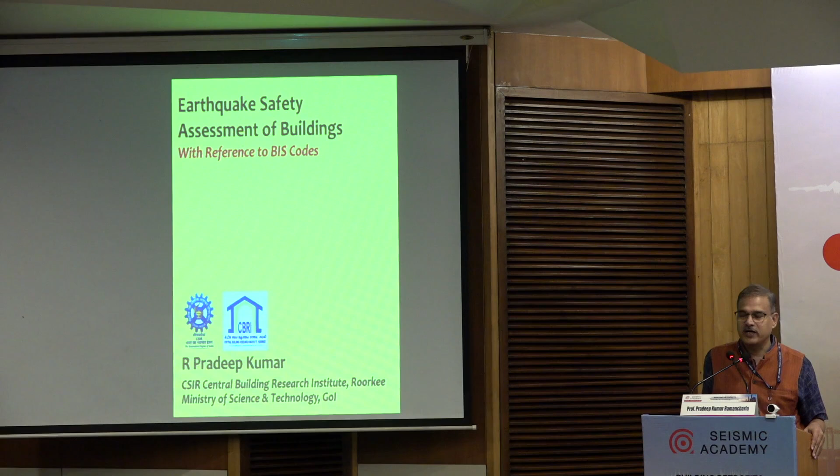So, earthquake safety assessment of buildings with reference to BIS codes. I'll tell you what are the challenges, what are the possibilities, and some examples. With some examples, I'll try to tell what we could achieve, and there are many more things which can be done. So let's start with these items which I want to present today.

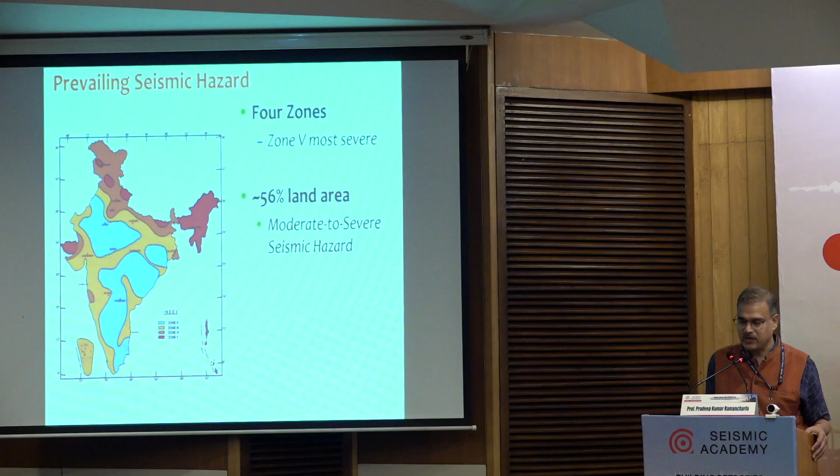You all know this is the prevailing seismic hazard. Currently, officially this is the hazard map, and soon it will change to this one. The country is divided into 4 zones: zone 2, 3, 4 and 5. If we calculate the area, 56% belongs to zones 3, 4, 5, which has a possibility of moderate to severe earthquakes. That means Bhuj kind of earthquakes might occur in 56% of the land, and 82% of the population is living in that 56% of land. That is another issue.

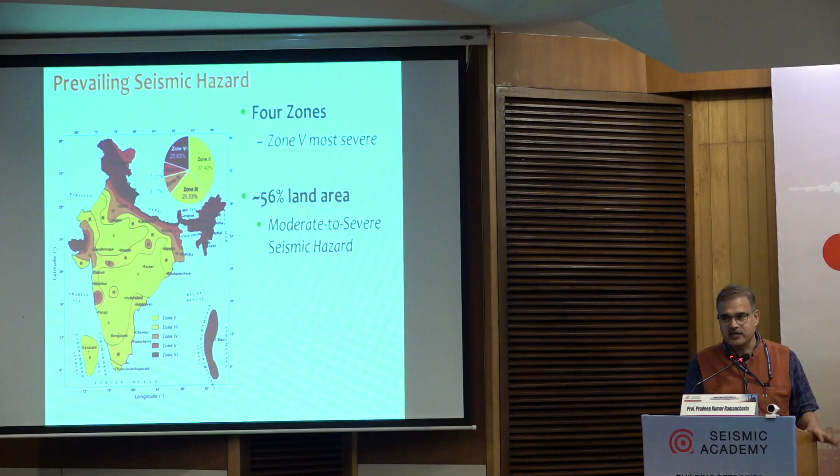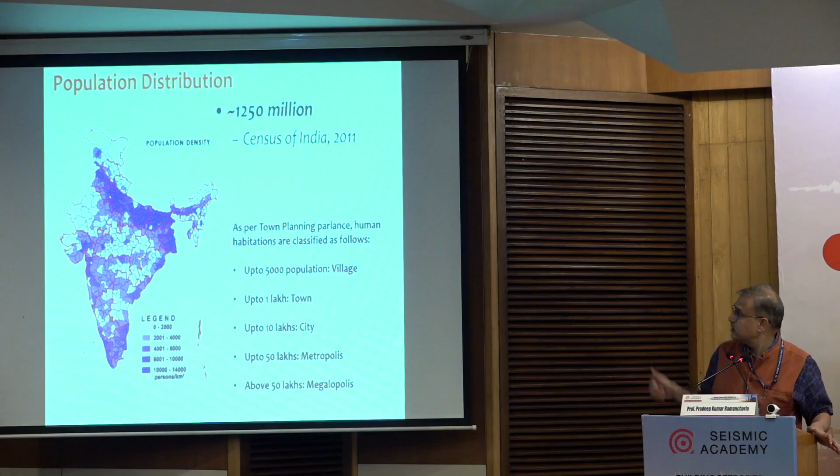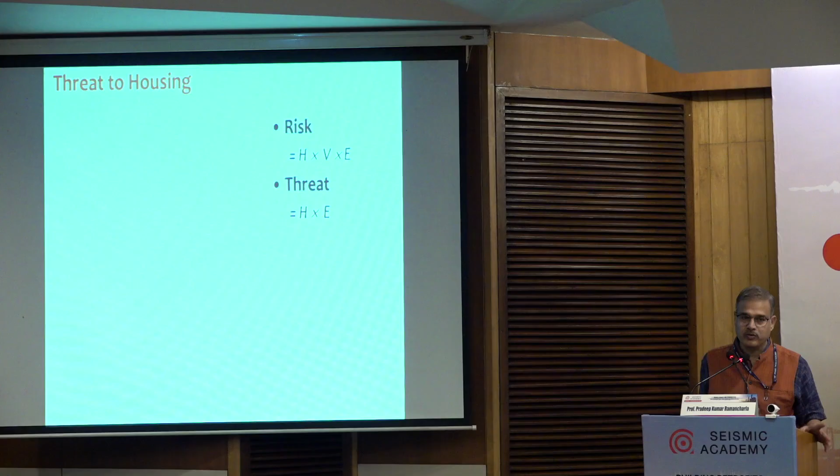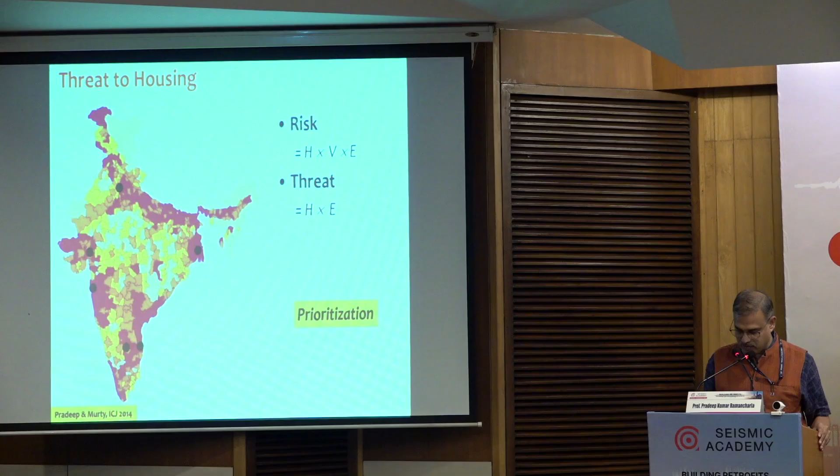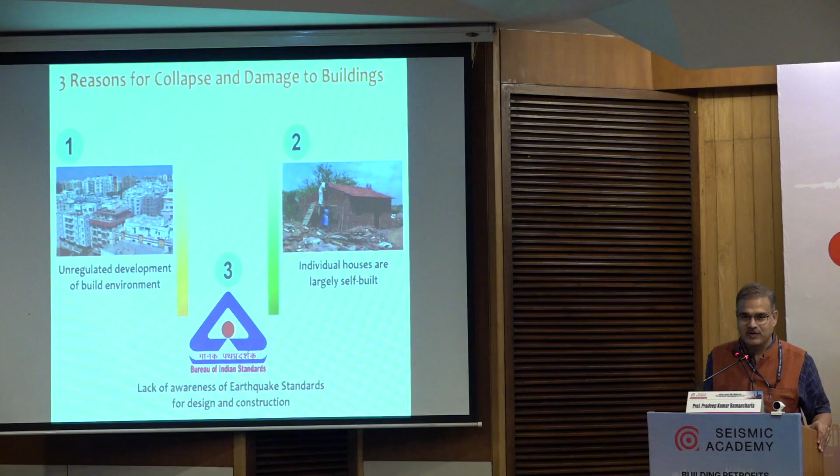तीसरी गलती है कि अपने आप को अपडेट नहीं करने की गलती। दीज आर द 3 मिस्टेक्स। सो वी हैव टू रिजॉल्व दीज 3। ओके, ये फैक्ट्स है, बस इतना ही है।

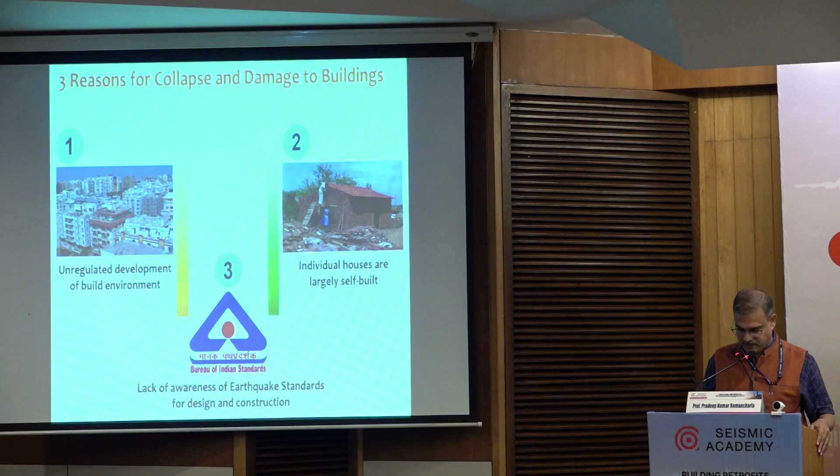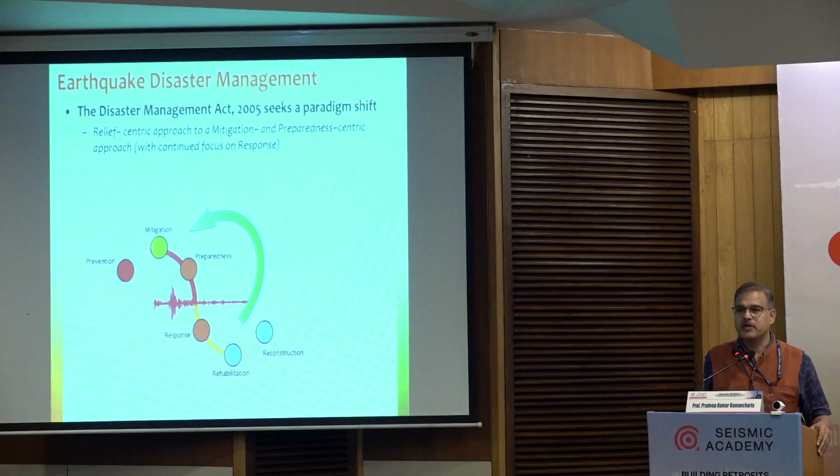So mitigation means what? Safety of buildings. Buildings which are coming up now, new, let us assume that they will be good buildings, but big structural stock is already there. So how to assess and retrofit? Unless we give a business spin to that, that is not going to flourish. So we need to give proper business model for assessment and retrofitting. Otherwise वो magic नहीं होगा।

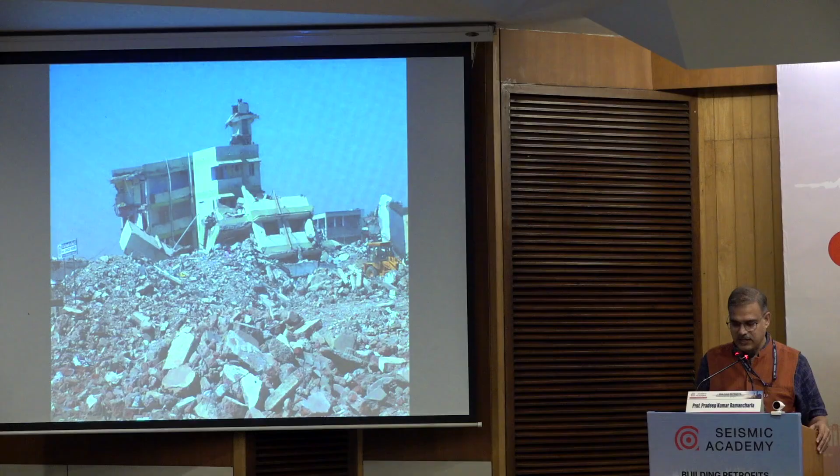Okay, some glimpses I will show. Earthquake behavior, some technical items, damages. After every earthquake we are seeing such kind of pictures. Let's take reference of Nepal earthquake.

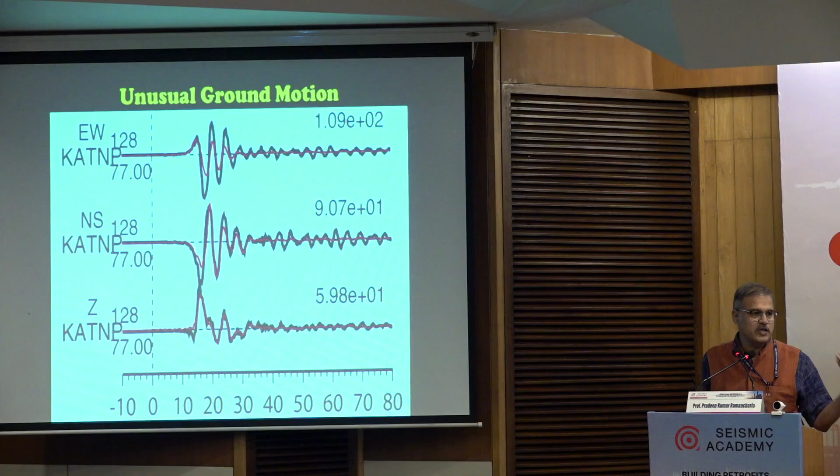Unusual ground motion. What is that unusual? Long period. So whenever long period ground motion occurs, main danger is to tall buildings or long period structures, whatever those structures are, and weak buildings anyway, they will collapse in any earthquake. So this is a famous Dharahara square in Nepal, long period, collapsed. Long period, the top element collapsed. Tall building, severe damage. Boundary walls, long period, collapsed.

So that means what? Earthquake is clearly showing that what it is coming up with. So we can understand easily that these are the things for which we have to protect our building. So for that, relevant clauses are there. The problem is what? We are taking these clauses lightly.

So my advice to everyone, whoever is in the field, okay, learn one clause a day thoroughly. Even in dream you will not commit any mistake while practicing that clause. One clause a day, that's all. In a year you will be mastering 365 clauses. Utne nahi hai, okay, bas one clause a day.

Promise today. Now coming to hazard. Hazard का मतलब क्या है? Simple. Hazard का मतलब है level of ground shaking which the building is going to experience.

That is measured in terms of acceleration, velocity and displacement depending on what type of structure you are doing it. How it is measured? There are many ways. Deterministic approach is there, probabilistic approach is there, a combination is also there. And there are many approaches which our experts are also generating, but finally they will be categorized into two and combination of the two.

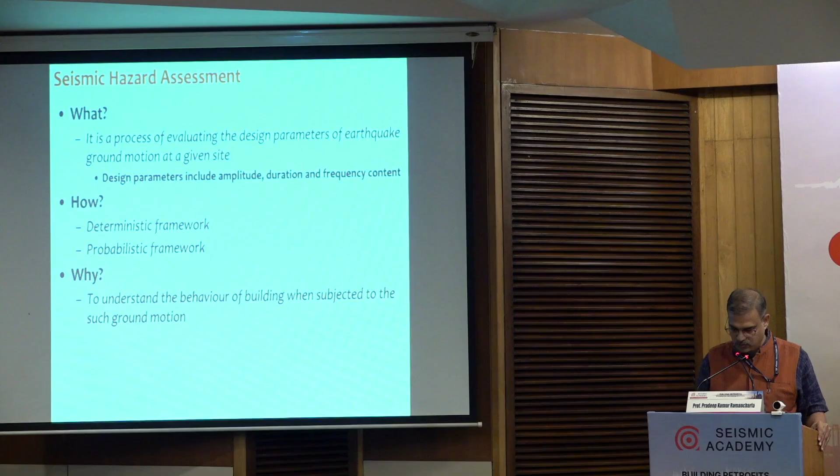Why it is needed? Hazard estimation to understand the behavior of the buildings when it is subjected to ground motion. But there are some gaps in it. Presently, we don't have probability in our hazard map. That means what? A zone 4 near the foothills of Himalaya is equal to zone 4 in the peninsular India.

That is the peak ground acceleration. But unfortunately, after how many years that earthquake is going to occur, that point is not included in the hazard map. Maybe down the line, if many people contribute, that also will come into picture.

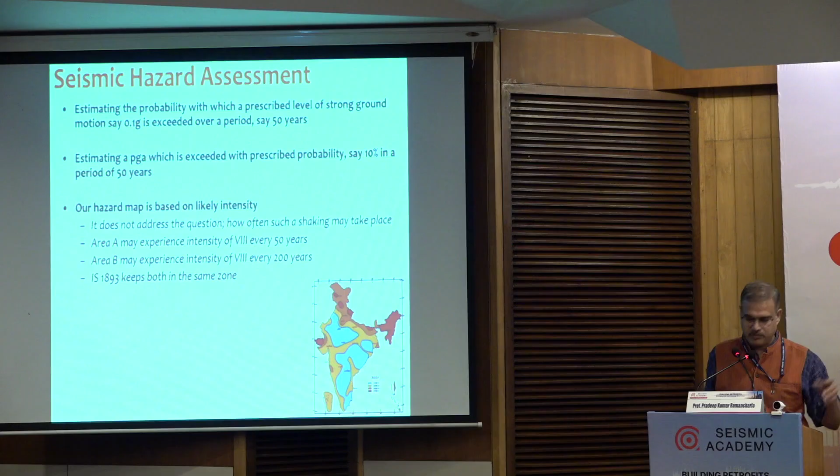Now, three ways. Macro hazard at a scale of 100, 200, 300 kilometers. इसलिए one city, पूरा city का एक ही PGA, peak ground acceleration है। That can be used for all ordinary buildings. Maybe 4-story, 5-story buildings तक we can use that. That is the macro hazard.

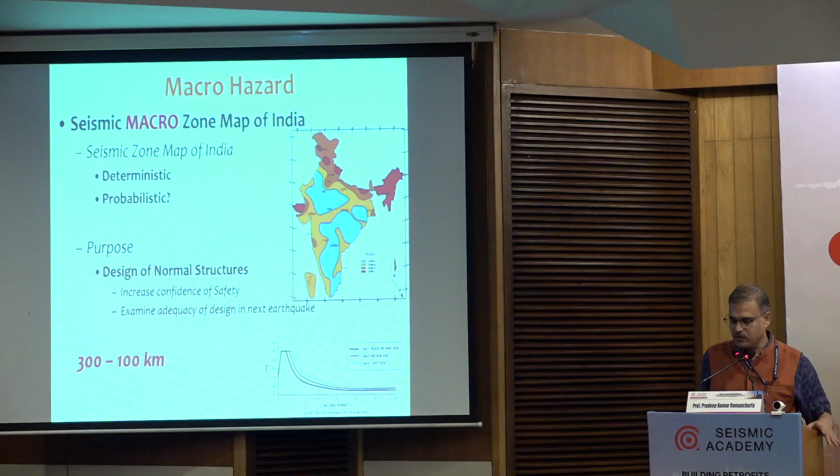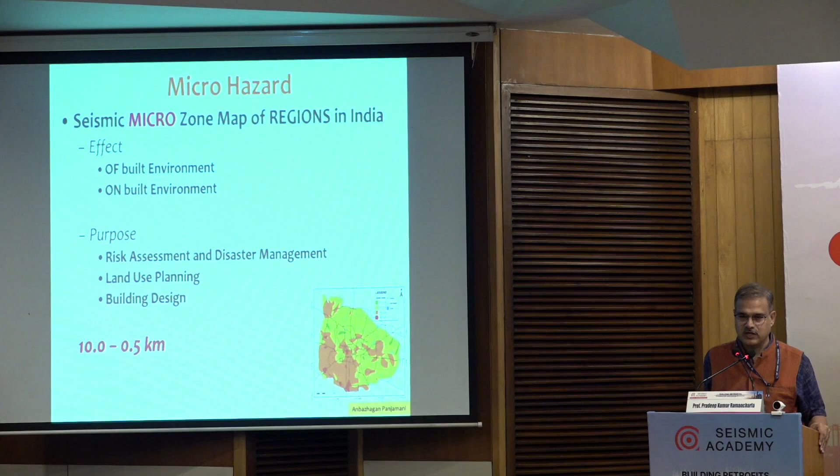But थोड़ा और आगे जाते हैं, सिटी प्लानिंग करना है, तो उसके लिए माइक्रो हजार्ड इज नीडेड, बिकॉज वी कैन नॉट अफोर्ड टू लूज आवर इंफ्रास्ट्रक्चर। माइक्रो हजार्ड वर्क्स in the range of that 10 kilometers up to 0.5 kilometers।

When it comes to very important structures, you need to go for site specific hazard assessment. It is quite involved process. It is not a child's play. Okay, people who are involved in the practice for many years, maybe for about a decade, they clearly understand what are the intricate details of the site specific.

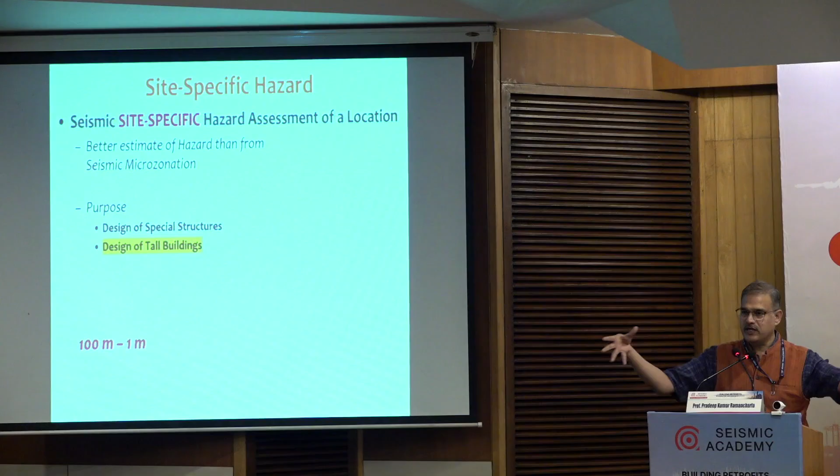So it gives values up to 1 meter. So that means whole city 1 PGA, that is macro hazard. In city there are different pockets have different peak ground acceleration values, that is micro hazard. For specific, say India Habitat Center region, if you are trying to estimate, that comes under site specific hazard estimation.

So in site specific hazard estimation, these are the technical items which are needed. So one is source identification. यहाँ से 300 किलोमीटर के दूरी में कितने sources हैं, that one, and then we find attenuation relationships. Then finally finding out the peak ground acceleration at the bedrock level, scaling up models, then finally amplification, and then we find out values, design parameters at the surface level.

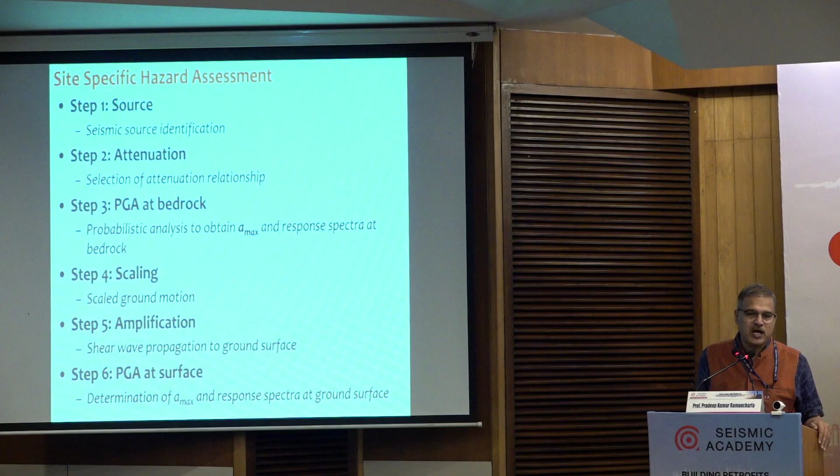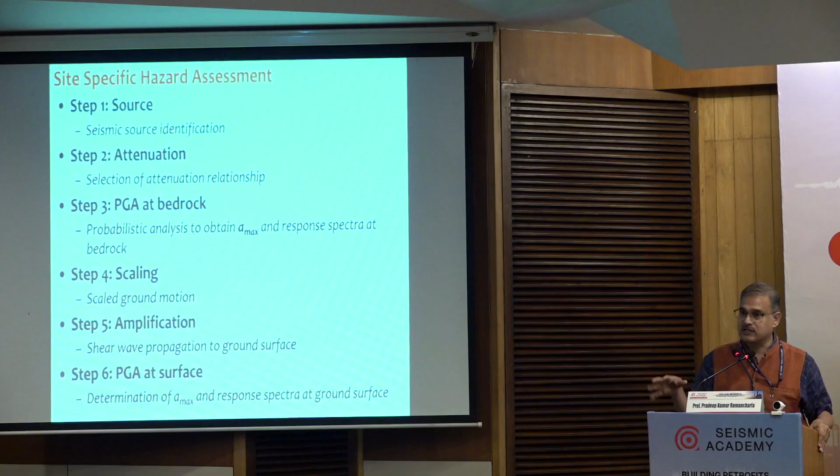That's how we bring all the knowledge filtered into these 6 steps for getting acceleration, displacement or velocity, so we should design structures on this campus. That is the complete procedure. Well-known theories are there, and the important items to be taken into consideration are magnitude, source mechanism, path, and local effects.

Now what's happening is that in very important projects, the last part is missing. Why? Even a 30-story building, 50-story building, without soil structure interaction, we are putting it on the fixed base and doing the analysis. That is a blunder.

This means people who are doing this have not done their assignments properly in college, or bunked the class. So we should study, we have to be well versed. That's point number 3, lack of awareness of seismic codes of practice.

So soil structure interaction is very, very important. Now code 16700, the tall building code, specifically recommends that if a building is 150 meters and above, you have to take care of soil structure interaction effects.

For soil structure interaction effects, a simple table has been made, like a thumb rule. So you need to do this for high rise buildings in all 3 categories - soft, medium and hard soil. In mid rise buildings, medium soil and soft soil are compulsory. In low rise buildings, it's not needed that much.

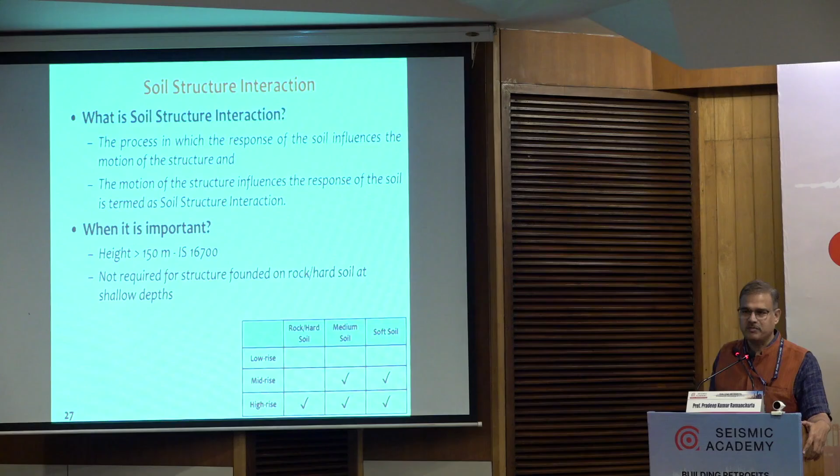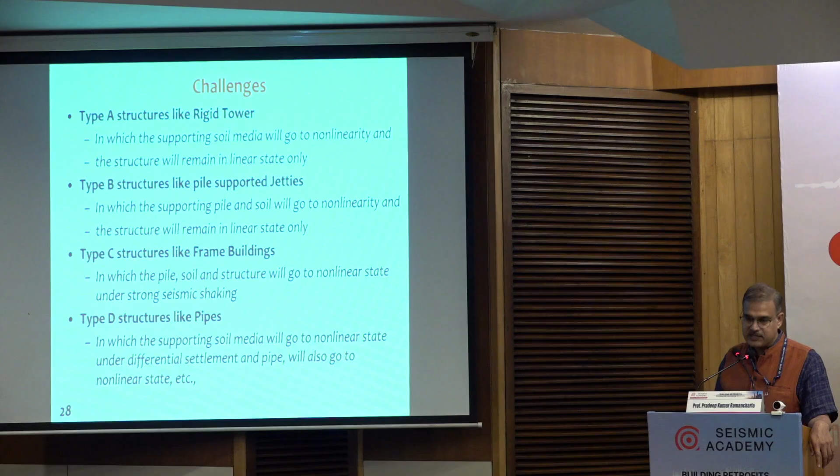If you want details, there's more. There are 4 types of structures actually. Type A has rigid towers, Type B has pile supported jetties, Type C has framed buildings, and Type D has structures like pipelines.

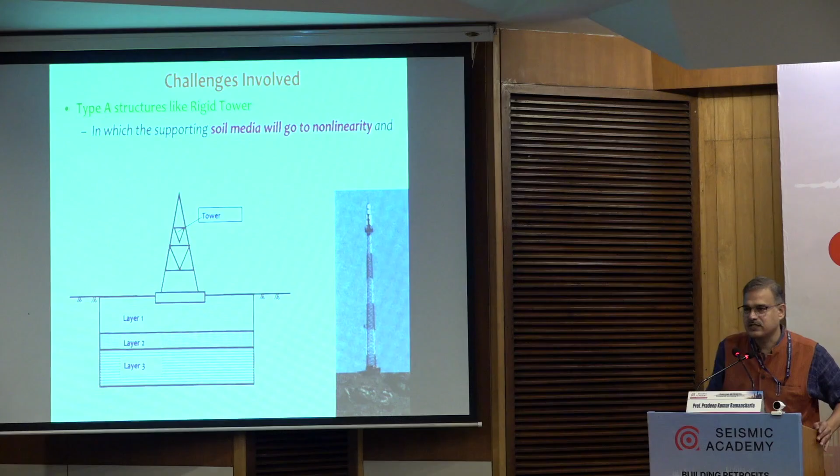So for every structure there are challenges in terms of when that structure will enter into non-linearity and how many components of that structure enter into non-linearity. Depending on that, we need to take soil properties and design the structure. Design mainly means we have to find out the force which can act on that structure. That is very important.

So if we put fixed base, we get some natural period and dynamic properties. But if it is on the flexible base, dynamic properties get altered. So that means the earthquake force which the structure is attracting will change.

Suppose we are designing for say 10% of weight, that is base shear. But when it is on soft soil, it is attracting 20% of equivalent weight as base shear, or maybe say 7% of equivalent base shear. So it can be less, it can be more.

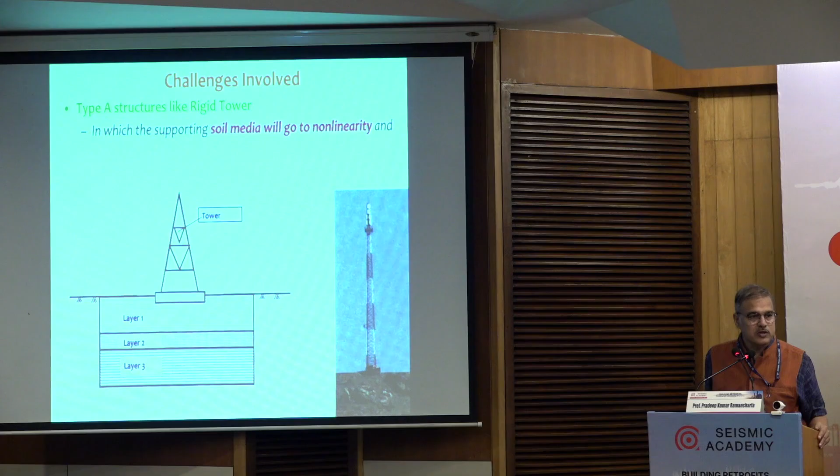So let us not play with lives of people who are going to stay there. In a simple example, when you buy a mobile phone, if it doesn't work, what do you do? Go and return it or fight with that person. But with buildings, whether it's working or not, we cannot say in 1 or 2 days, or 1 or 2 years - it has to serve the entire life, 50 years. So if it falls at that time, that is the problem.

So these are some of the examples. Soil structure interaction cannot be taken lightly.

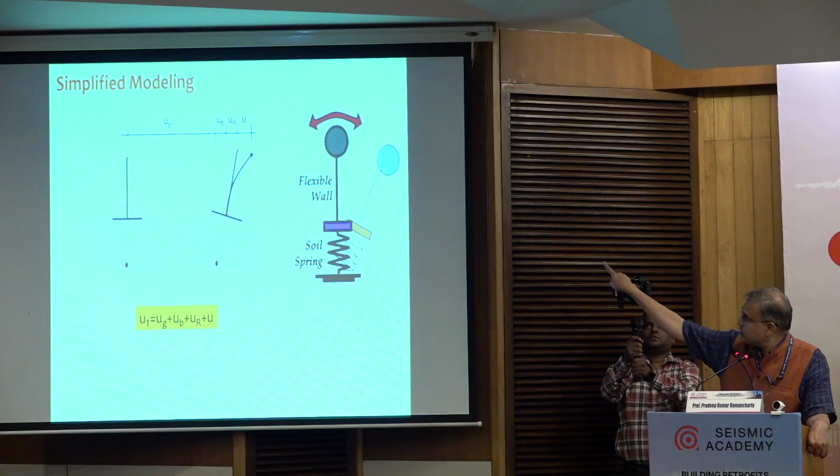One is ground displacement, which is UG. Second is base displacement, that is base of that footing or raft, whatever it is. The third one is rocking because of the subgrade reaction of the soil. And finally the displacement of the structure.

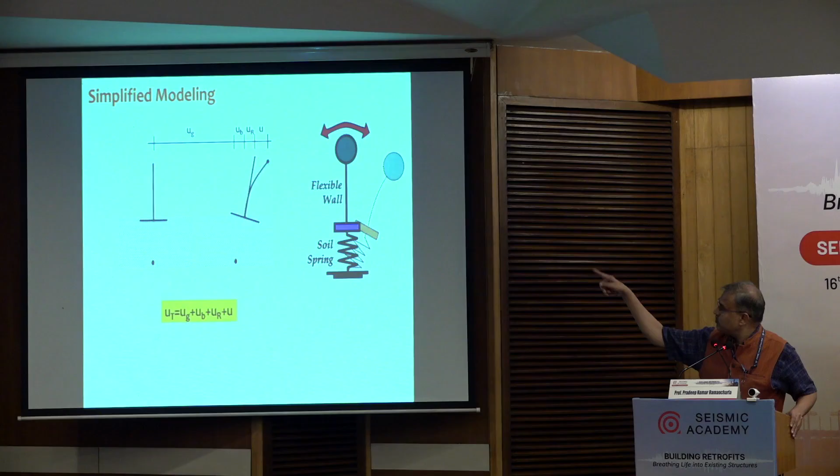There are 4 items. Presently what we are doing is removing three of them, and managing with just one. Okay, it's a blunder. Yes or no? That's all.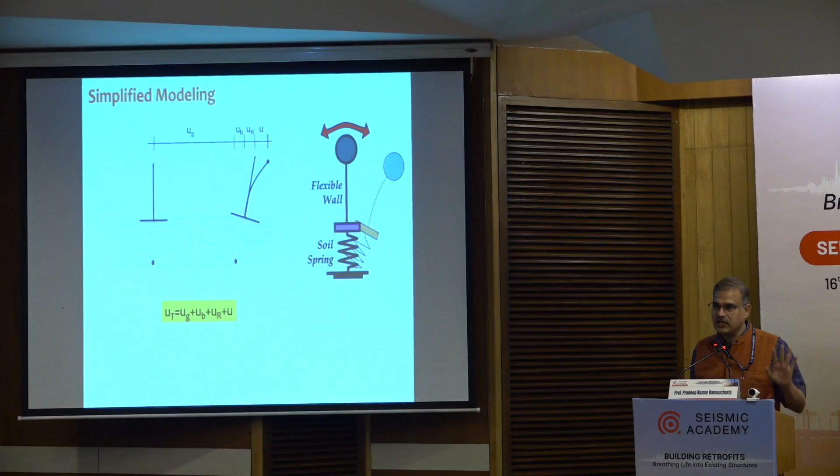So we need to upgrade ourselves technically. That's why I'm saying, attack one code clause a day. Just promise yourself that. You are serving the profession - you don't need to do anything else. That much is enough.

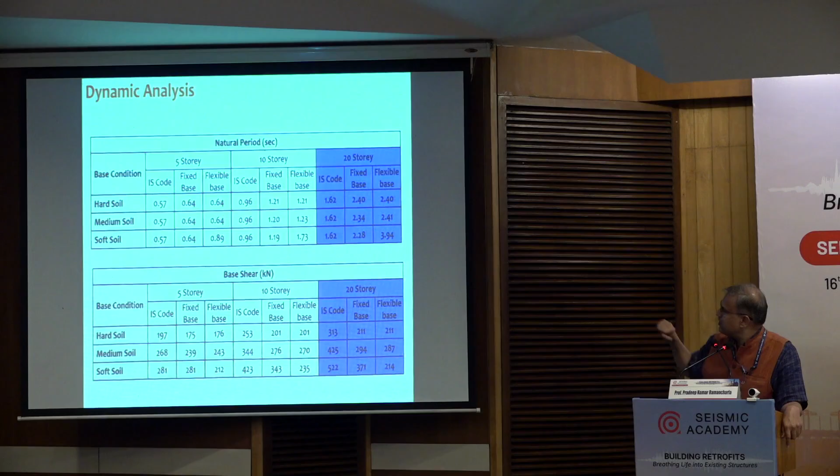So there's an example of low, medium, high rise structures in soft, hard and soft, medium and hard soils. Simple, I'm not going into too many details - how natural period is changing, how base shear is changing. These blue color boxes are giving the indication.

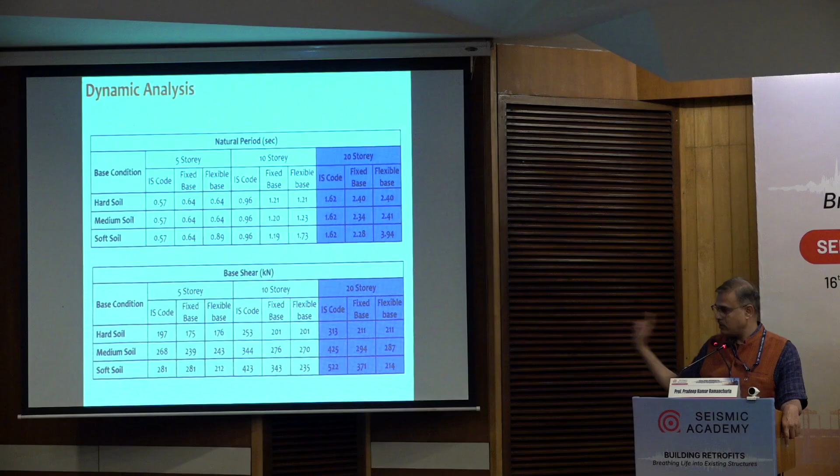So presently whatever code is there - in soft soil, if the base shear is 522, fixed base analysis is giving 371 and flexible base is giving 214. Actually that much is the attracted force, only that much. In some cases it will become higher. So this we need to understand.

पढ़ना है बस, अपने आप को अप्लाई करना है उसमें.

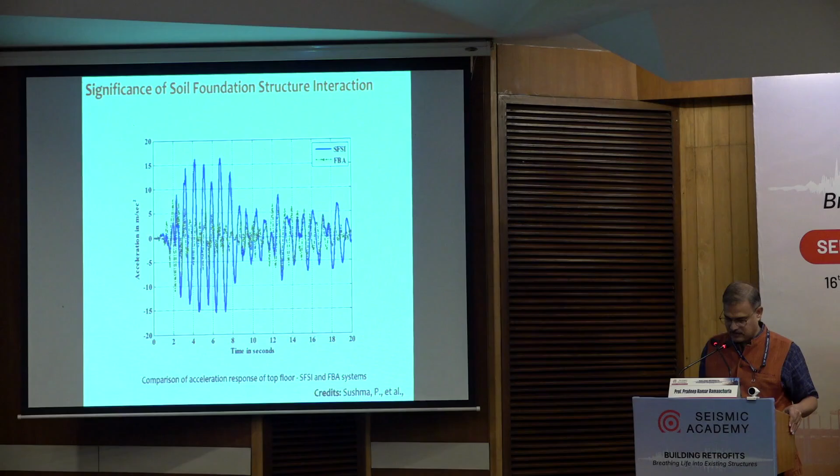This is a shift in the period. Period elongates or frequency reduces. So that means we are cheating - client को जो दे रहे हैं actual problem का solution हम नहीं दे रहे हैं, कुछ ना कुछ ऐसे ही बेच रहे हैं. क्यों? अपने ज्ञान की कमी की वजह से. That's all. The moment we acquire knowledge, we become authentic person.

वो इम्पॉर्टेंट है. तो हम सबको need है रीडेडिकेट करने की आवरसेल्फ को आवर प्रोफेशन के लिए.

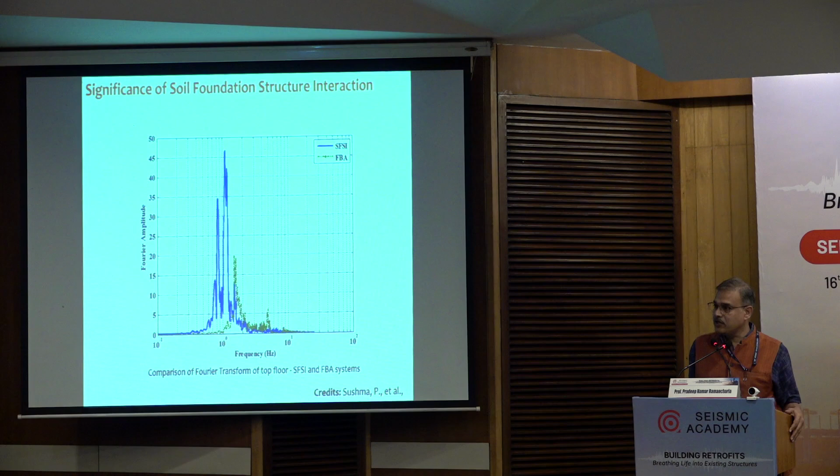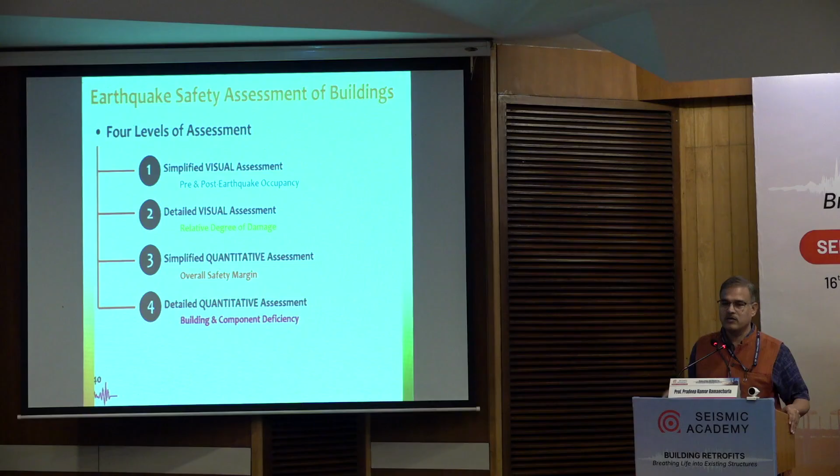नाउ कमिंग टू लेवल ऑफ अर्थक्वेक सेफ्टी. देर आर 4 मेथड्स और 4 लेवल्स. सिंप्लीफाइड में 2 मेथड्स है, डिटेल्ड में 2 मेथड्स है, और क्वालिटेटिव 2 मेथड्स, क्वांटिटेटिव 2 मेथड्स. द सेम थिंग इज नाउ इन द न्यू कोड, IS 13935, the upcoming code. So it is giving 5, the same 4 are converted into 5. There is a level 0 and a level 5 responses.

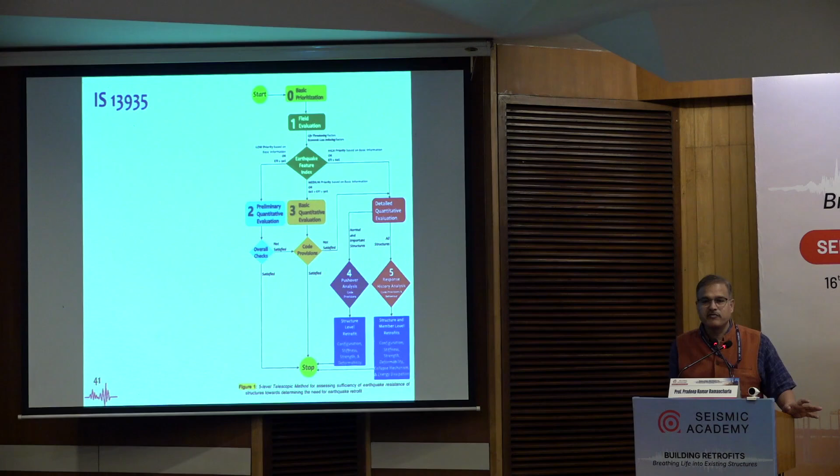तो इसको सिंपल तरीके से बताऊंगा. लार्ज नंबर ऑफ स्ट्रक्चर स्टॉक इज अवेलेबल इन द कंट्री. कितना 30.5 करोड़ बिल्डिंग्स आर देयर इन द कंट्री. सबको असेस करना है. कैसे करना है?

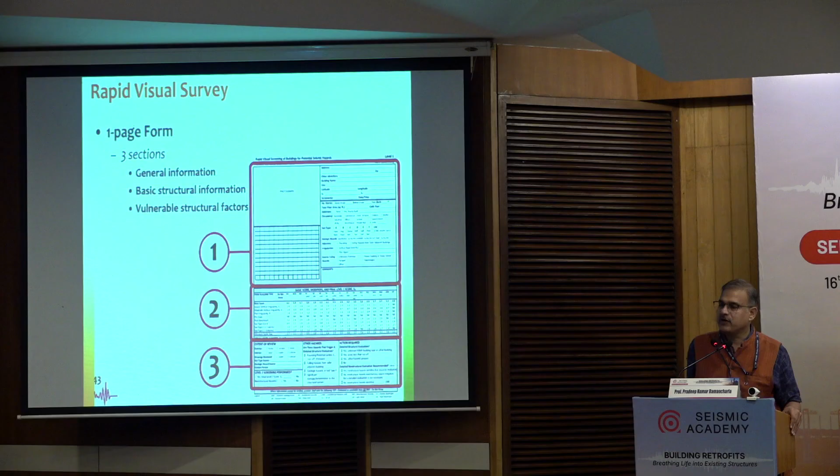टिपिकली दिस इज द RVS फॉर्म, रैपिड विजुअल सर्वे फॉर्म. उसमें जनरल इंफॉर्मेशन, दैट इज लोकेशन, एड्रेस, कहाँ पे है ये म्यूनसिपैलिटी, ऑल दैट. सेकंड वन इज बेसिक इंफॉर्मेशन, लोड बेरिंग स्ट्रक्चर और फ्रेम्ड स्ट्रक्चर. एंड थर्ड वन इज द पेनल्टीज, द वल्नरेबल स्ट्रक्चर फैक्ट. इतना ही रहेगा. Generally 100 points are given to good building, penalty that is negative score.

And then finally 100 minus negative is the score of the building. High score good building, low score not so good building. But one important thing is we need to benchmark that.

Simple example, benchmarking का example देता हूँ. Blood pressure benchmarking कितना है? 80/120. How it has come? It's not magic. After surveying so many buildings and after looking at the performance of the people, in the health condition of people, that 80/120 is fixed. Exactly like that for buildings, RVS benchmarking is needed.

That we did. We surveyed till now, I personally surveyed 80,000 buildings in the country. उसका बड़ा न्यूज़ नहीं बनाया है बस.

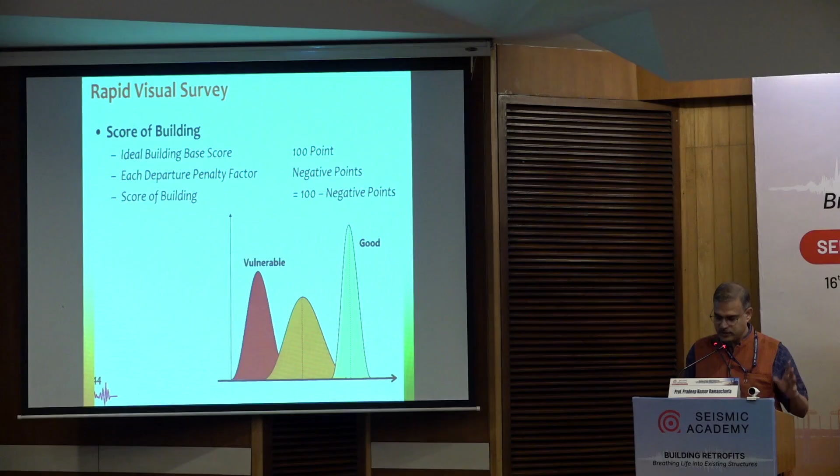Okay, so this is a typical RVS form, uncalibrated, but calibrate करते हैं तो I'll show you that calibration also. And how the penalties are decided based on the irregularities, that is table number 5, table number 6.

By heart कर लीजिए, रट्टा मार लीजिए, याद रहना चाहिए. पहले याद होगा, उसके बाद में समझ में आएगा बस. राइट, याद हो जाएगा, उसके बाद में समझ में आ जाएगा. Table 5, 5 irregularities, plan irregularities. Table 6, 7 irregularities. So these are the irregularities.

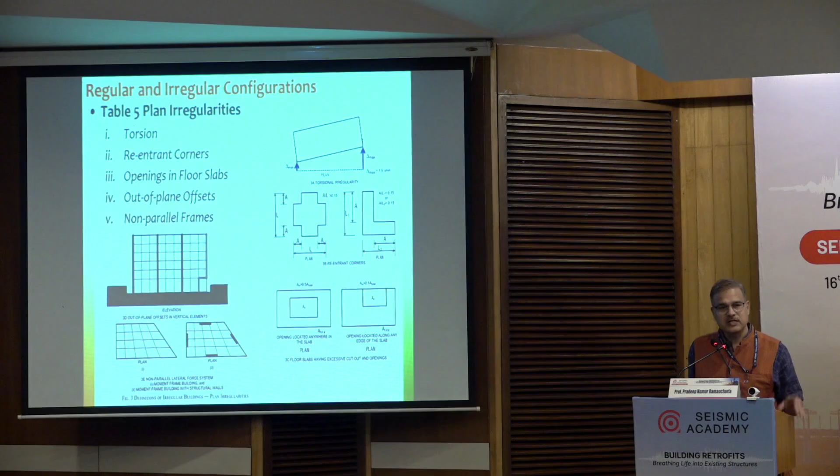When they are there, they become penalty points. They are something like, to me they look like शुगर का लेवल इतना है, किडनी में ये है, गाल ब्लैडर में स्टोन है, हार्ट अटैक है, स्टेंट है, दैट काइंड ऑफ थिंग्स. दीज आर ऑल दीज थिंग्स. सो दैट डिसाइड्स द हेल्थ कंडीशन ऑफ ए पर्सन.

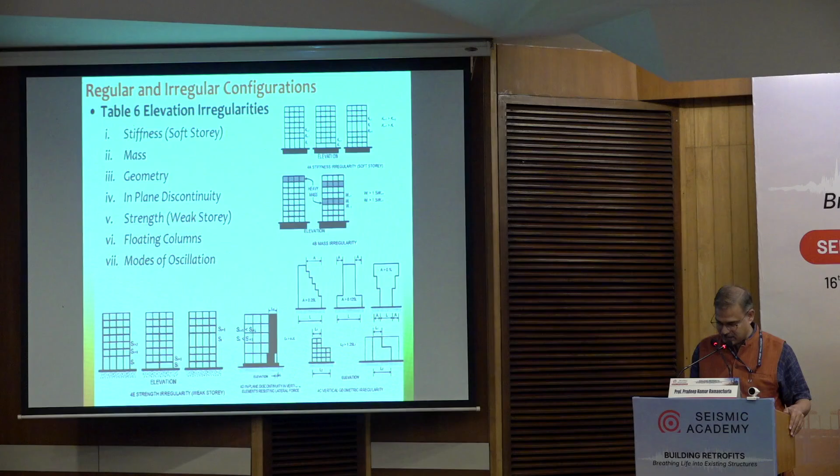नाउ फर्स्ट एक्सरसाइज वी डिड इन गुजरात. 20,000 buildings were surveyed. Okay, majority of the buildings were masonry. So if we do the scoring, that histogram of the score, RVS score 0 to 100, x-axis is RVS score, y-axis is number of buildings in that category. So इसको benchmarking करना है.

So we have selected some buildings in each category, mean plus or minus 1 sigma, plus or minus 2 sigma. That means 5 categories are there. Out of that we have selected some buildings.

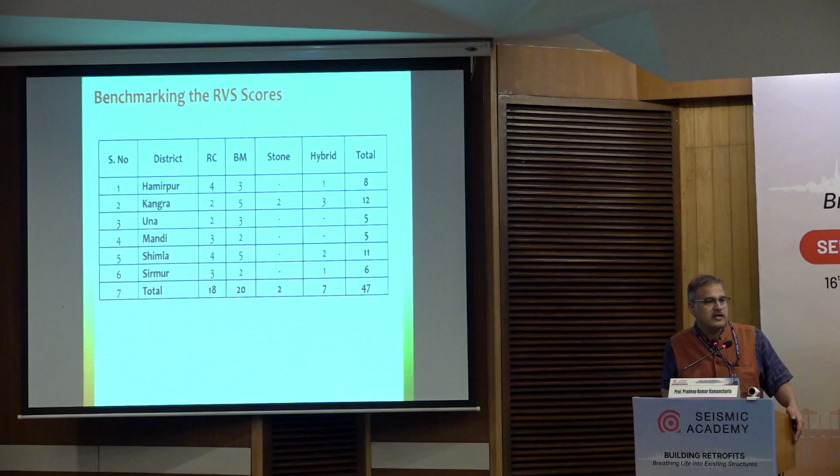ये हिमाचल प्रदेश में किया था, 10,000 बिल्डिंग के सर्वे के टाइम पे 47 buildings we identified and did the detailed estimation. That means geometry properties, soil properties and dynamic properties. वो करके मॉडलिंग किया है बिल्डिंग्स को, to match the computer model with the actual ground level situation. We have installed vibration sensors on the building and matched the building model. So finally we could able to get this curve.

This curve clearly indicates what is, depending on the RVS score, the correlation with the damage. ये 10,000 buildings के study करने के बाद ये result निकला है. Imagine a building score is 35 and it is there in zone 5, 0.36 G, you all know. So that means what? Building will collapse. You can see the curves.

वो आज के डेट में हमको पता है बिल्डिंग इज गोइंग टू कोलैप्स करके. सो वी कन्विंस द ओनर, टेलिंग हिम और हर कि भाई आपका घर रेट्रोफिट कर लेते हैं तो बच जाएगा. सो रेट्रोफिट के लिए क्या करना है? टेक्निकल सॉल्यूशन तो चाहिए ही. इन एडिशन टू दैट वी नीड कन्विंसिंग द ओनर एंड हु विल पे मनी.

ओके, सो रेट्रोफिटिंग में 3 चैलेंजेस है. टेक्निकल चैलेंज, इकोनॉमिक चैलेंज, सोशल चैलेंज. टेक्निकल चैलेंज, हम कुछ करके टेक्निकल चैलेंज को रिजॉल्व कर सकते हैं.

Economic and social challenges need to be solved with brand ambassadors. In our country, people follow what good and respected people do. So if we consider ourselves respected, we have to prove that our building is safe, and then we should tell people. If it is not safe, we retrofit. So we've started retrofitting buildings in CBRI itself first, to demonstrate the technology. Then for the economic challenge, we have to convince people.

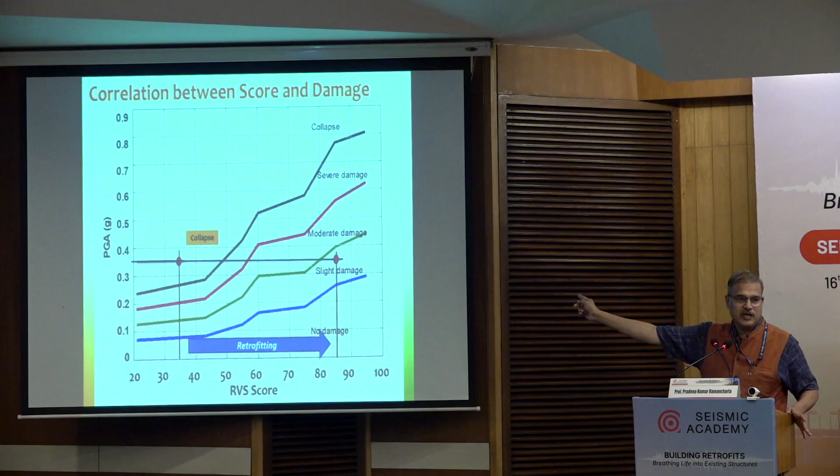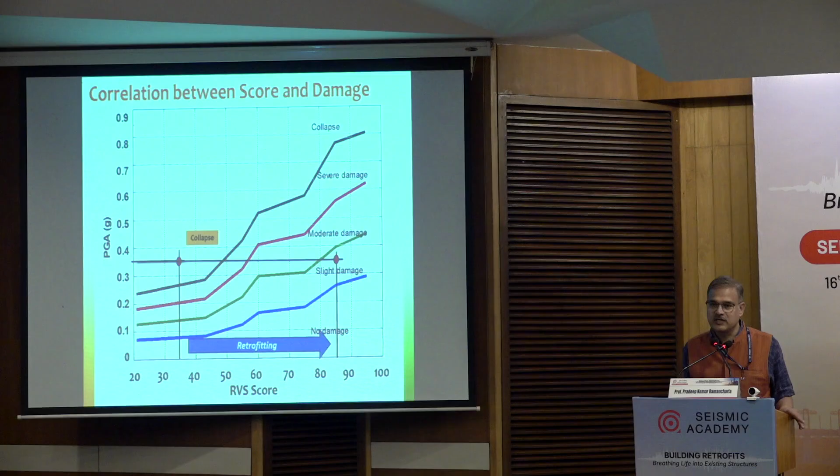With support from NDMA, we have prepared RVS, Rapid Visual Survey forms, which give the score for 7 building typologies. Another 20 odd typologies are left to cover, but this itself covers almost 80% of the country.

This is freely downloadable - just search NDMA RVS Primer, it's freely downloadable. I feel satisfied when I show this one because I worked hard for it. I have done 3 main pieces of work, and this is one of them. Another is EDRI, Earthquake Disaster Risk Indexing.

After publishing that, we went to BIS and tried to convince them to bring this in the form of a standard. So a working group was formed, which I chaired. Within 9 months, we worked on the code and brought out IS 18289.

This also came out of a pain point. After an earthquake, so many buildings collapse - that's one part. But there are many buildings which are damaged, and homeowners get confused about whether to stay in their house or not, because aftershocks could cause the building to collapse. Who will tell them? Suppose 10 lakh buildings are like that - you need a quick assessment.

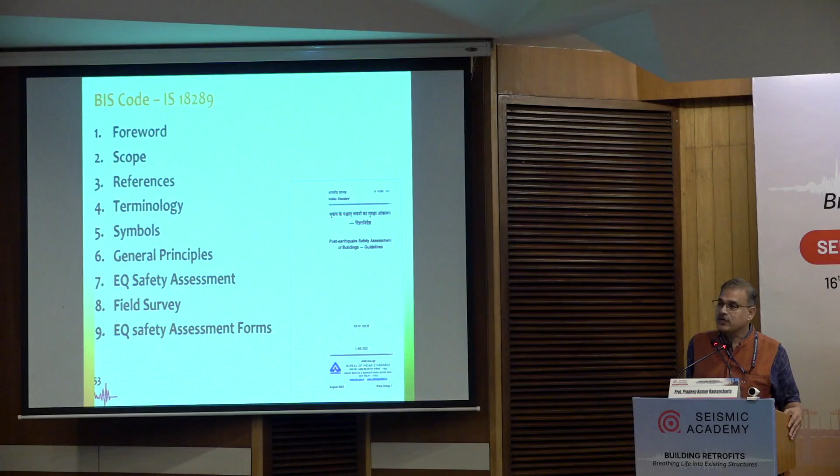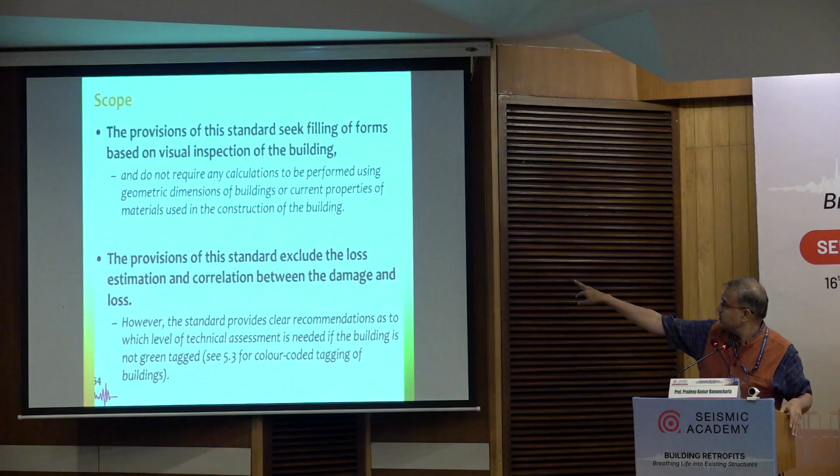So we designed a form which simply ensures whether life safety is there or not in that building, within 15 minutes. That is this code. Now it is standardized. In the event of the next earthquake, this will be used because it is now a legal document. So the scope of this is just to ascertain whether a building is livable or not after the earthquake.

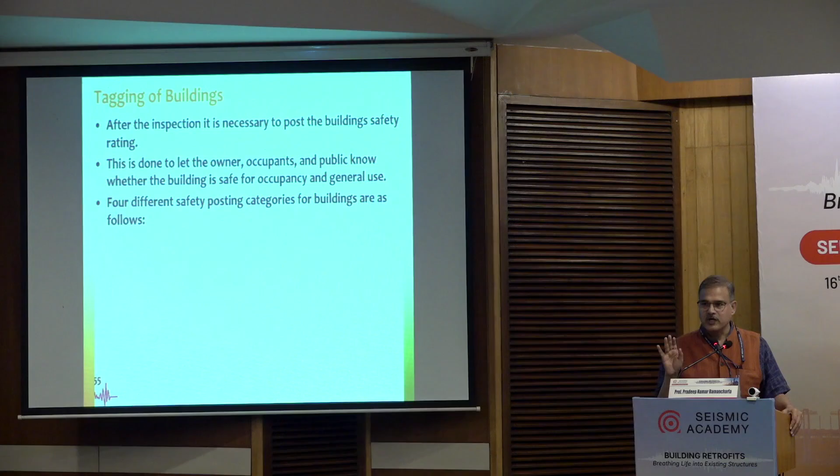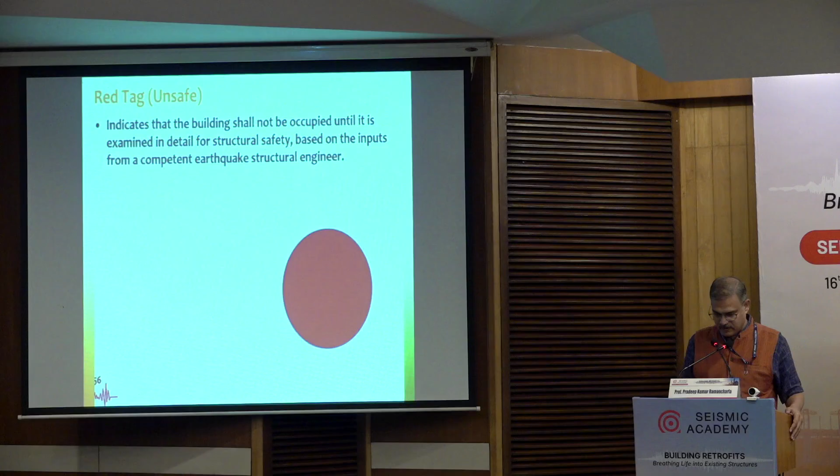Safety assessment inspectors need to be trained - 2 or 3 engineers and architects, trained people who can fill that form. Finally, how do you convey the result to the public? By putting a tag. Red tag means unsafe building, don't stay. Yellow means further inspection is needed. Green means safe building, stay inside. We are telling people with a safe building to stay inside.

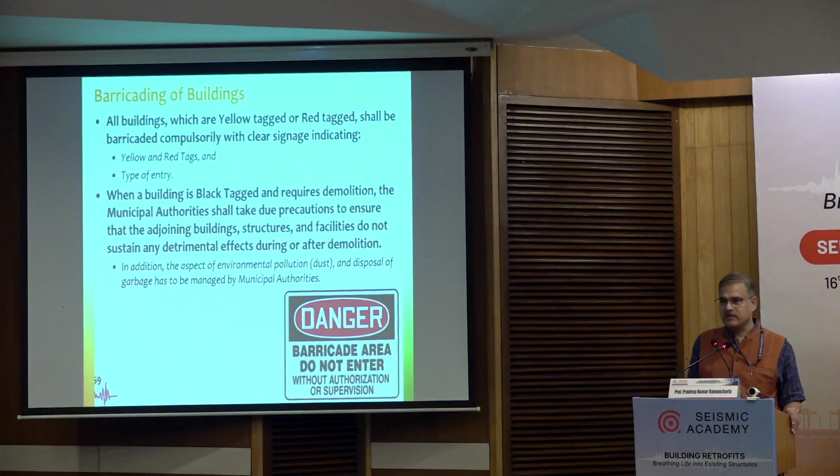Government appointed people do reconnaissance surveys, putting green tags and telling people that even if an earthquake comes, there's no problem. It's a big challenge, but we are achieving this now. And there is another category of building - black tag - meaning barricade it and demolish the building quickly.

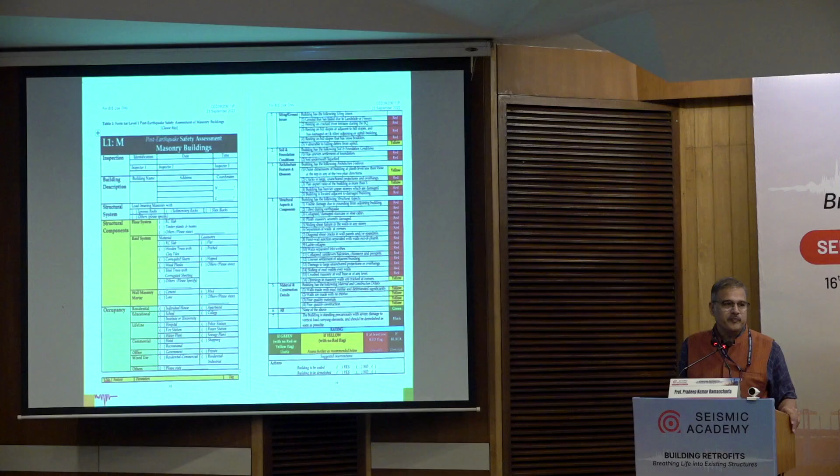On what basis do we give these tags? Based on this form, which has around 30 questions. If at least a single red is ticked, the building goes into the red category. If no red but at least one yellow is checked, the building goes into yellow. If no red and no yellow at all, the building goes into green. That is the stringent safety criteria.

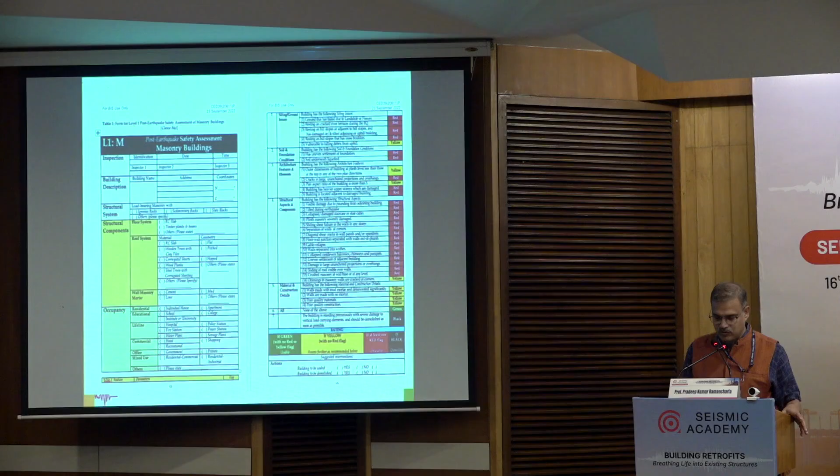And all this can happen in 15 to 20 minutes. Now, suppose 1 lakh buildings have to be surveyed - what do we do? We bring in the latest technologies. So we have tried drone based assessment, and finally out of these 30 parameters...